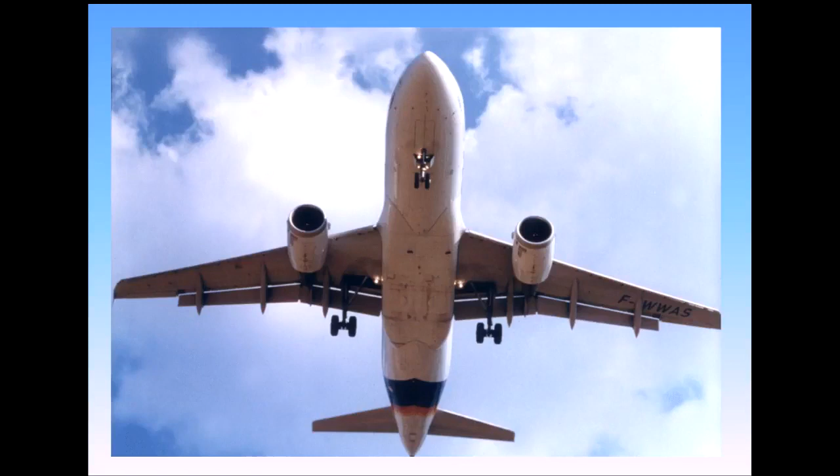The A320 is equipped with two air conditioning packs located in the wing root area forward of the landing gear bay. Let's look at how a pack works.

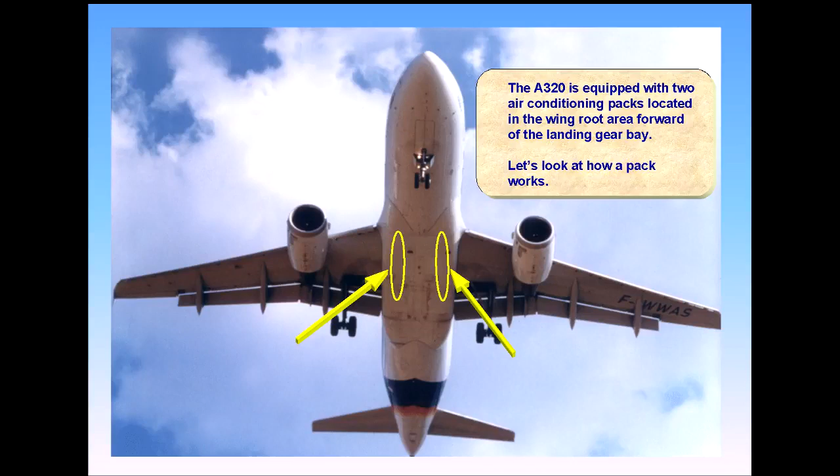Hot bleed air enters the pack via a pack flow control valve. The purpose of this valve is to adjust the flow rate through the pack.

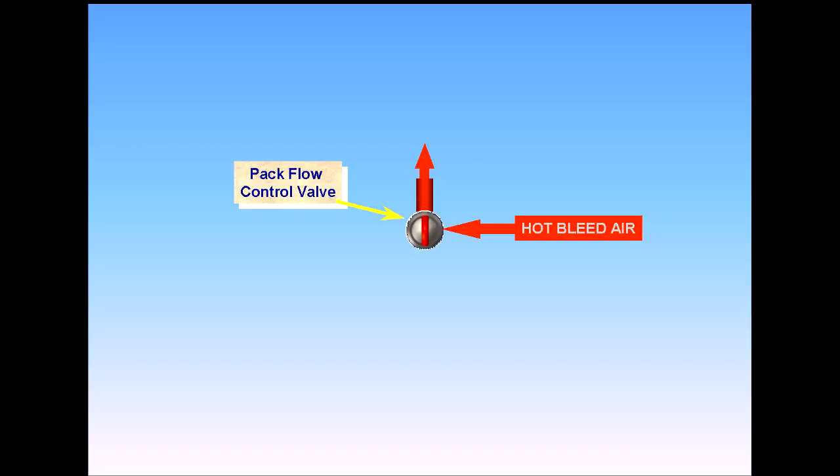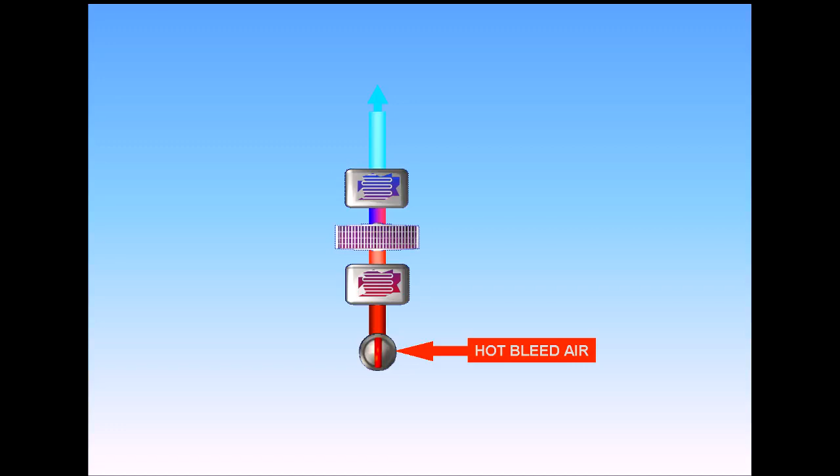The air then passes through several stages within the pack that progressively cool the air to provide a conditioned air output. In fact, sub-zero temperatures can be achieved.

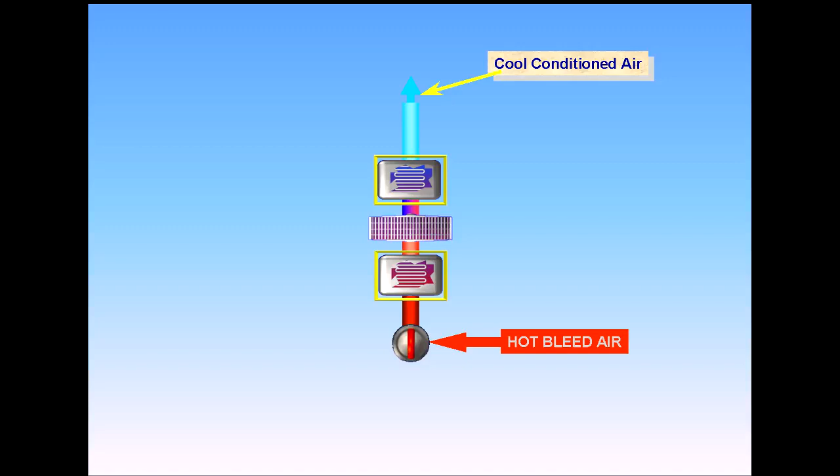Two of the stages are heat exchangers that use a flow of ambient air over them to cool the hot bleed air. This flow of air enters via a pack inlet scoop and exits via an outlet duct.

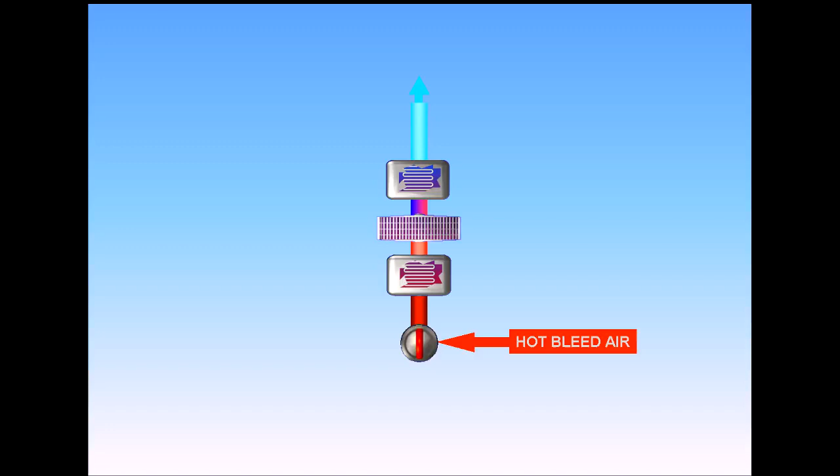So that the output temperature of the pack can be adjusted, a bypass valve is fitted. This valve allows warmer air to be mixed with the cold air.

Note, the bypass valve provides for greater fuel efficiency. Since the pack in many circumstances can be bypassed, less bleed air is needed from the engines. Thus, less thrust is needed and therefore less fuel.

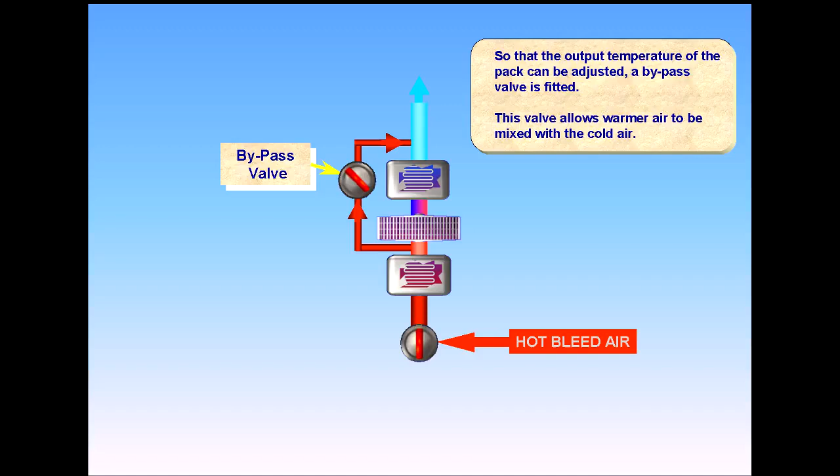The pack flow control valve and the bypass valve are regulated by the pack controller to vary the flow rate and temperature output.

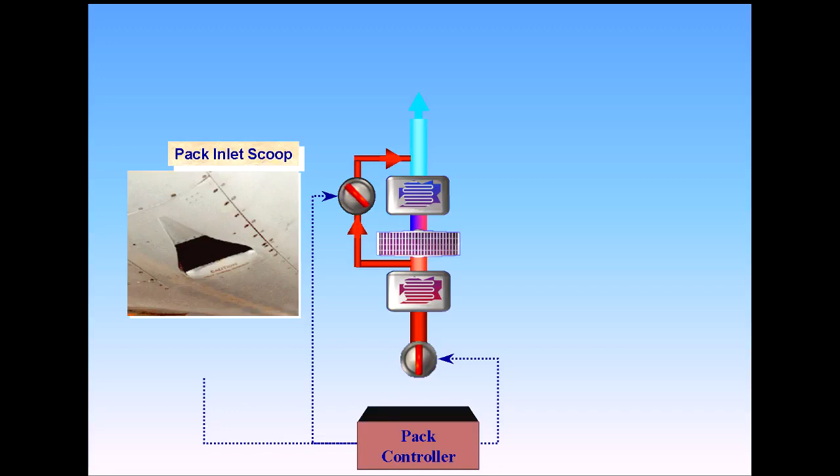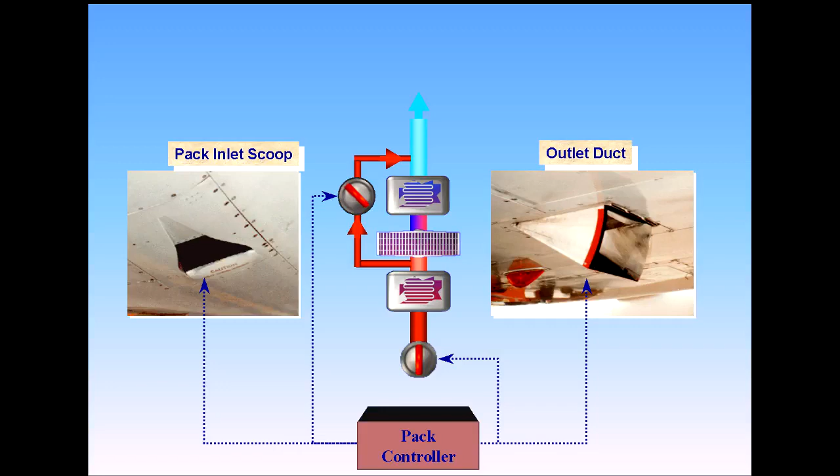The pack controller also controls the inlet scoop and outlet duct to vary the amount of air passing over the heat exchangers. Note, to avoid ingestion of foreign matter, the inlet scoop and outlet duct close temporarily during takeoff and landing.

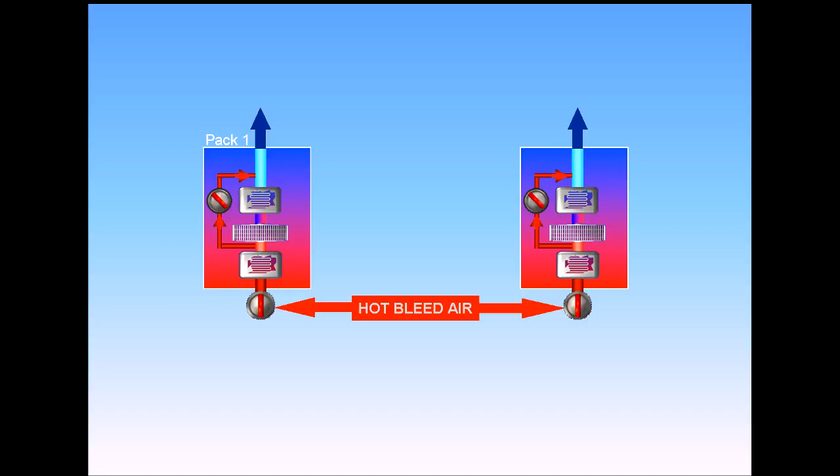The two air conditioning packs operate automatically and independently to provide cool conditioned air.

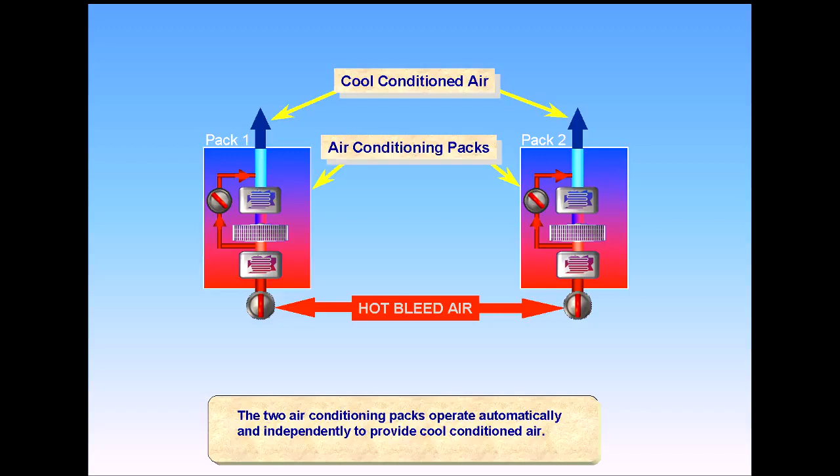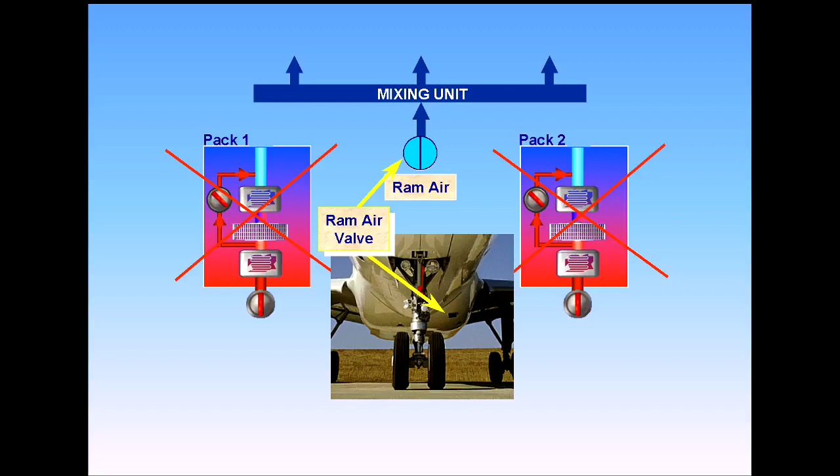The conditioned air from the packs is then fed to a mixing unit. In case of failure of both packs, ram air is provided via a ram air valve. We will look at the use of ram air in the abnormal operation module.

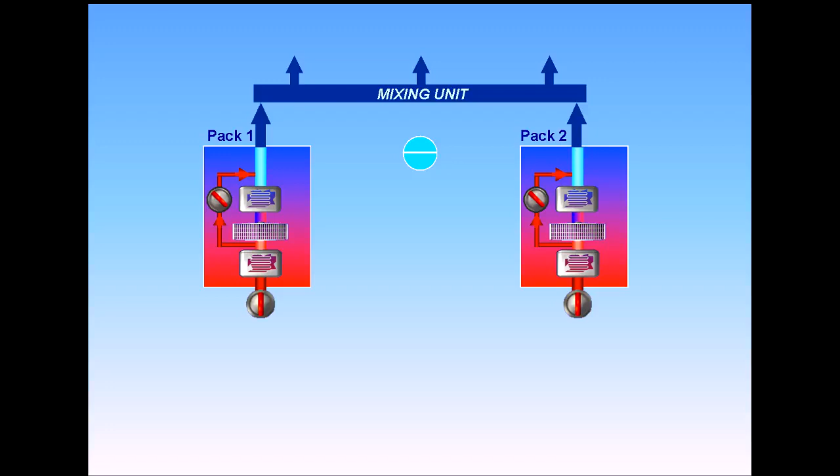Various pack parameters are monitored by ECAM. They are pack flow, compressor outlet temperature, bypass valve position, and pack outlet temperature.

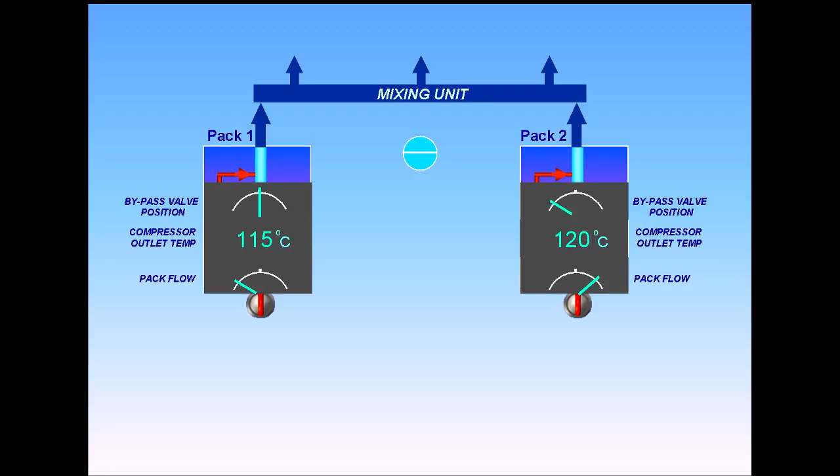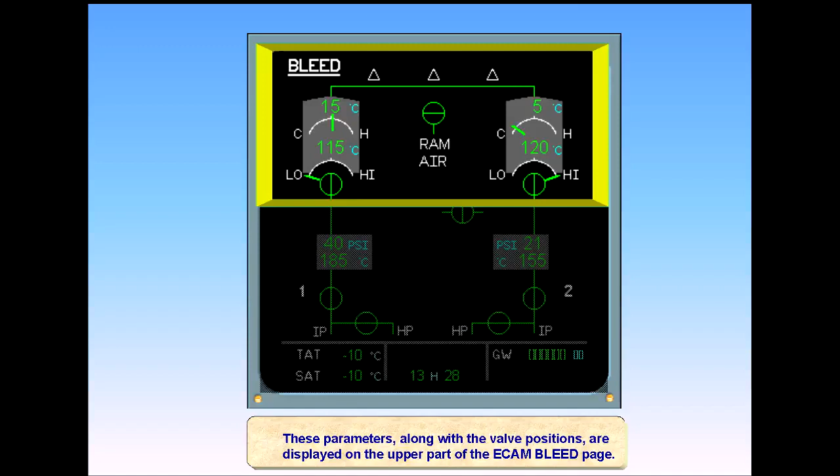These parameters, along with the valve positions, are displayed on the upper part of the ECAM bleed page. Having discussed the air conditioning packs, we will now look at how temperature and flow regulation is achieved throughout the aircraft.

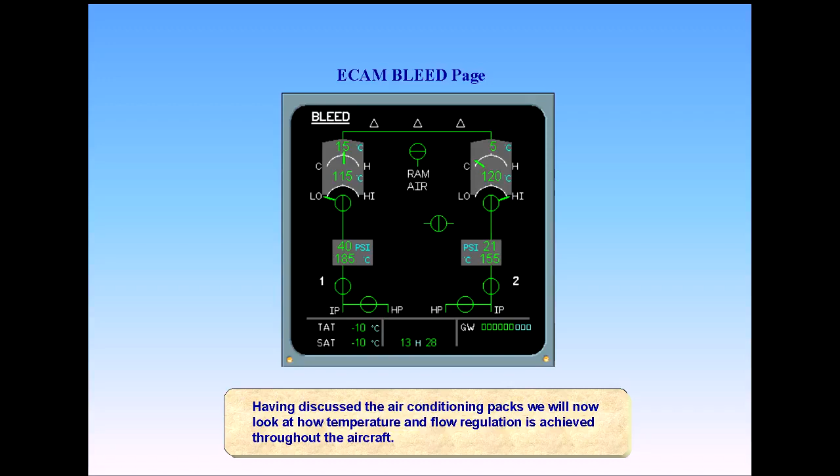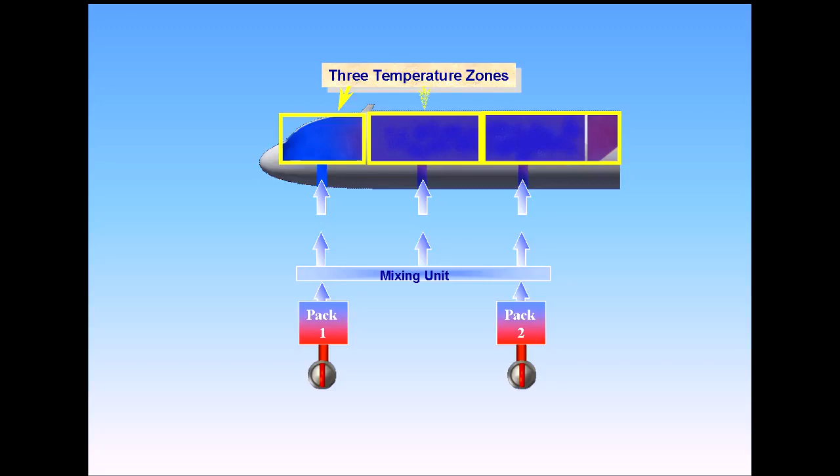The three outputs from the mixing unit feed three separate aircraft zones: cockpit, forward cabin, and aft cabin. Let's look at how the temperature of the zones is managed.

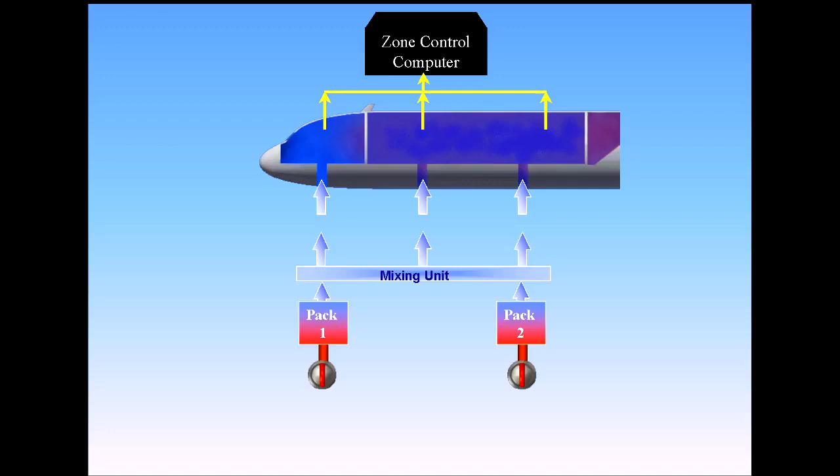A zone control computer monitors the temperatures of the three zones and sends signals to the pack controllers to set the air temperature delivered by the packs.

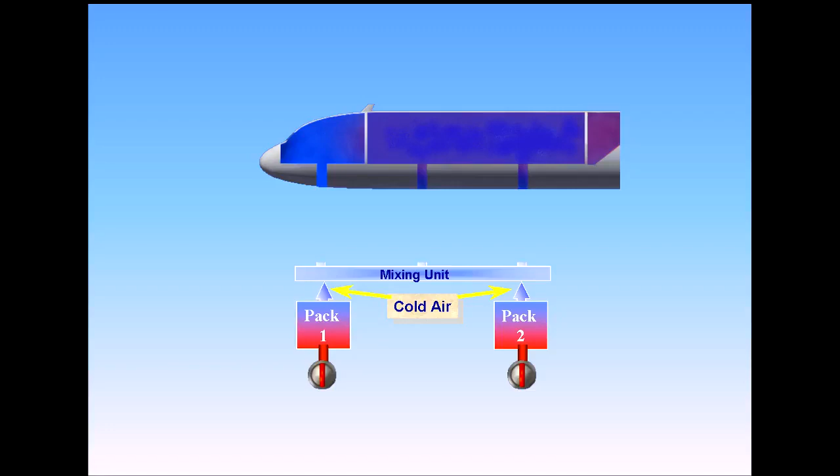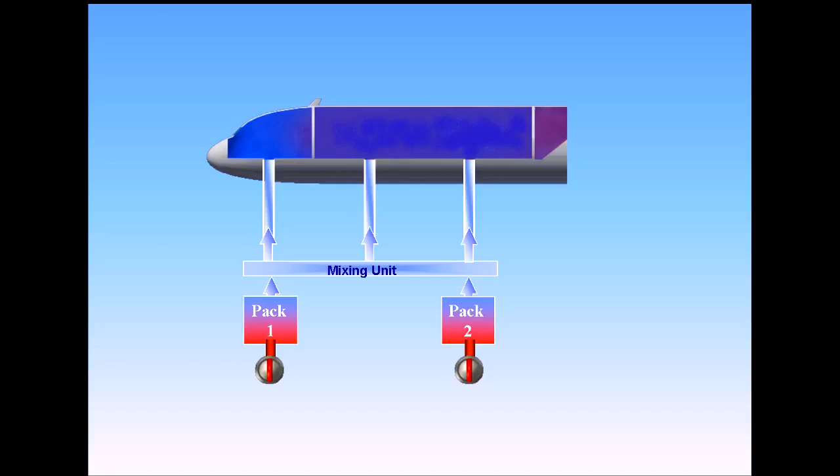Normally, cold air is delivered by the packs and is then sent to the three zones. Since the different areas of the aircraft may require different amounts of cooling or heating, hot bleed air can be added via trim air valves to achieve the demanded temperature for a zone.

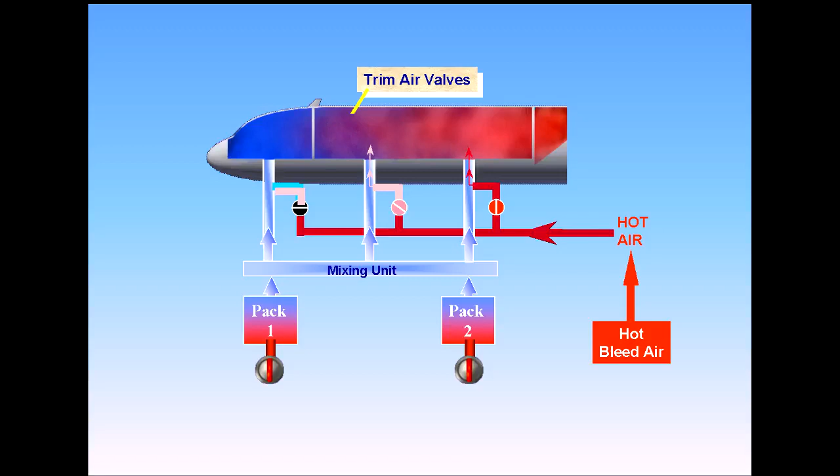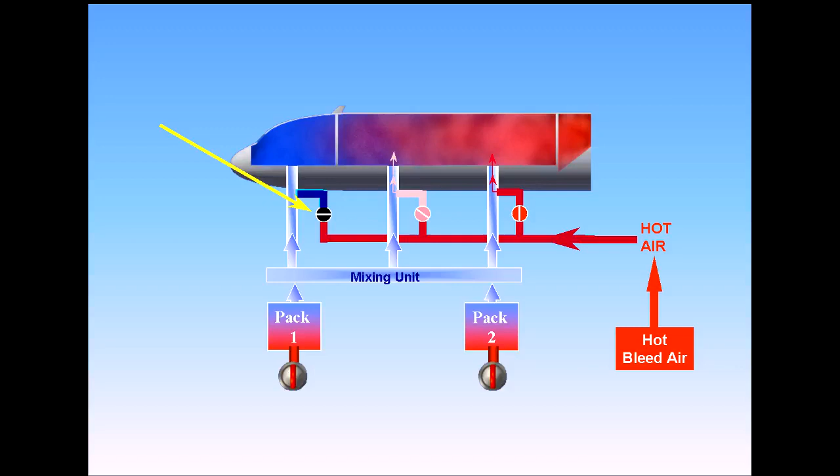In the example shown, no hot air is being added to the cockpit zone. Some hot air is being added to the forward cabin zone. A lot of hot air is being added to the aft cabin zone.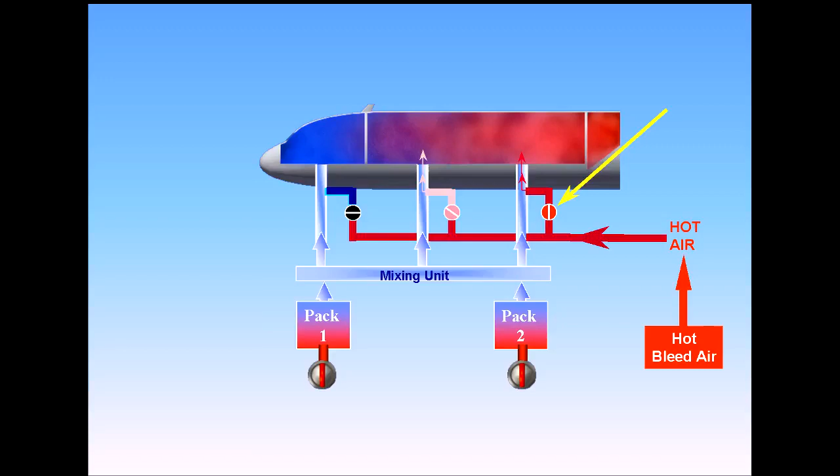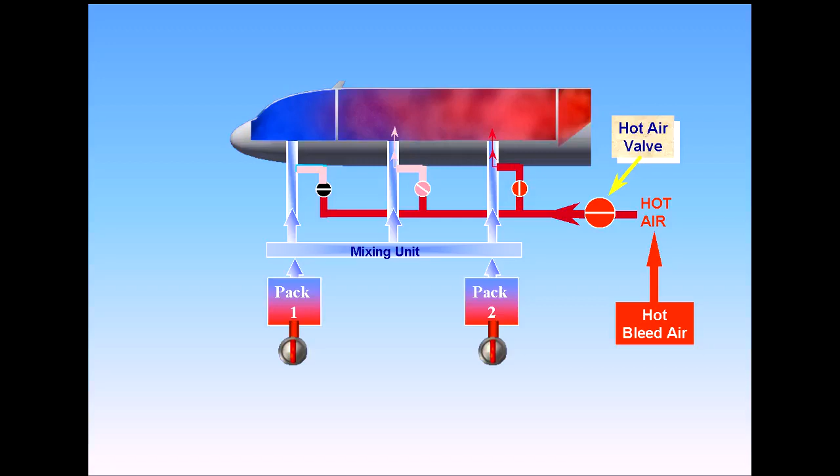The trim air valves are supplied via a hot air valve. The purpose of this valve is to regulate the pressure of the hot air supplied to the trim system and to act as a shutoff.

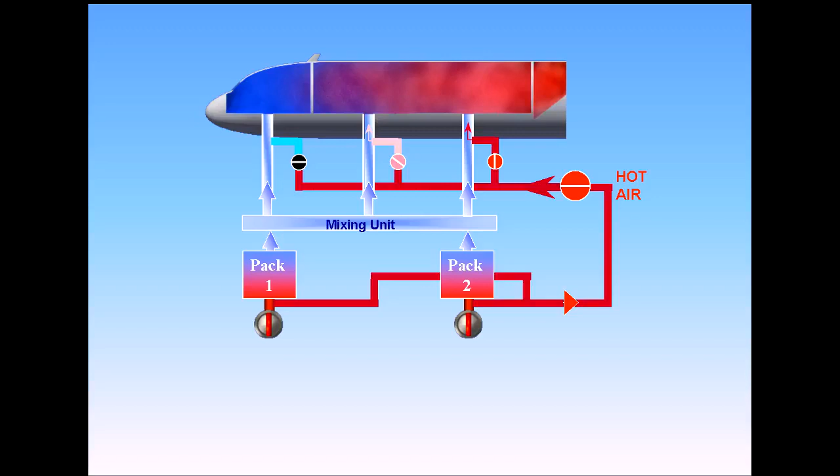The hot bleed air is supplied to the hot air valve from just downstream of the pack flow valves. This means that if the pack flow valves are closed, there is no air supplied to the trim system. The hot air valve and the trim air valves will automatically close.

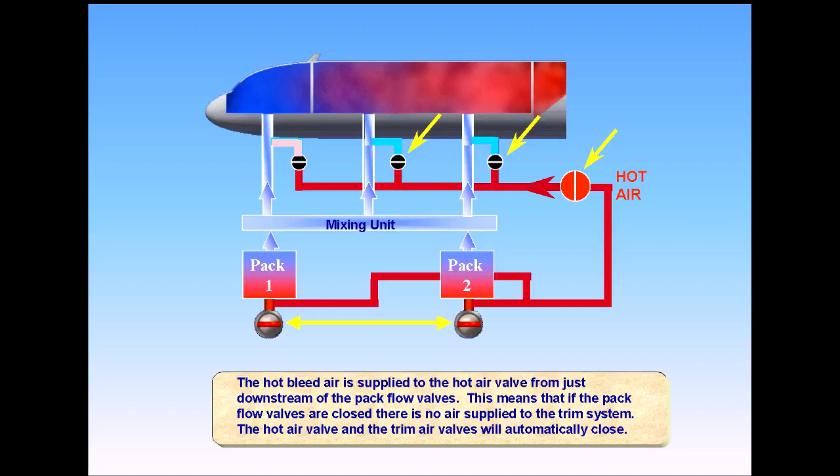The trim air valves and the hot air valve are controlled by the zone control computer.

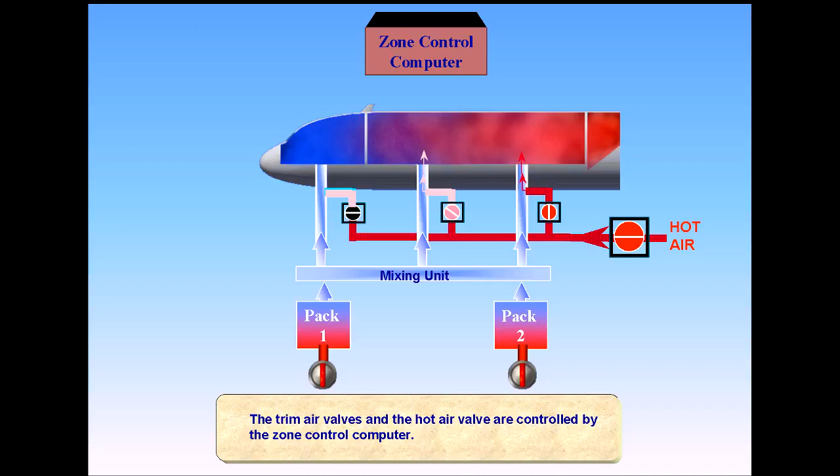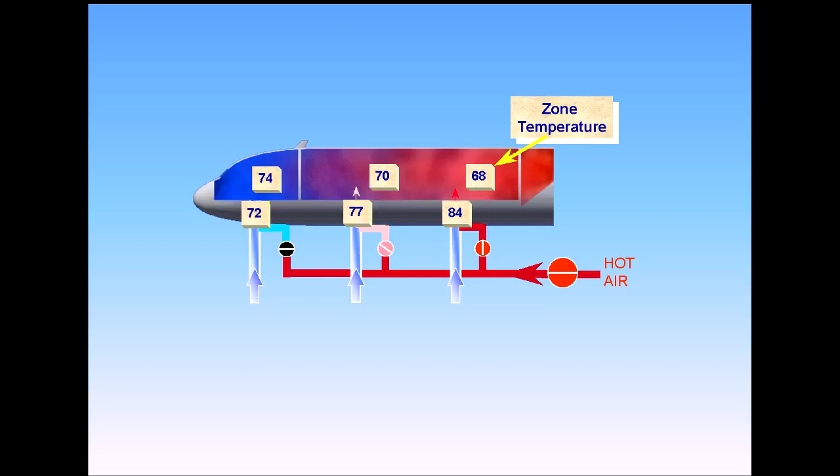Zone duct temperature, which is the temperature of the air entering a zone, and the actual zone temperature are monitored by the zone control computer and presented on ECAM.

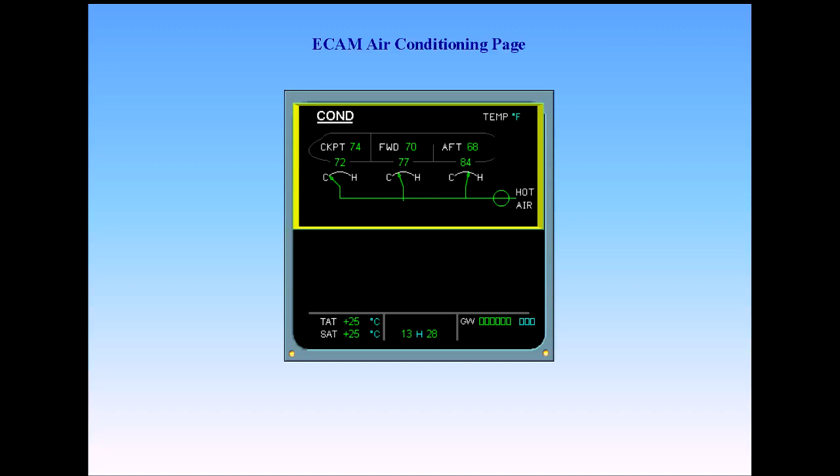The ECAM conditioning page contains zone temperature and trim air system indications. The ECAM cruise page also contains zone temperature indications.

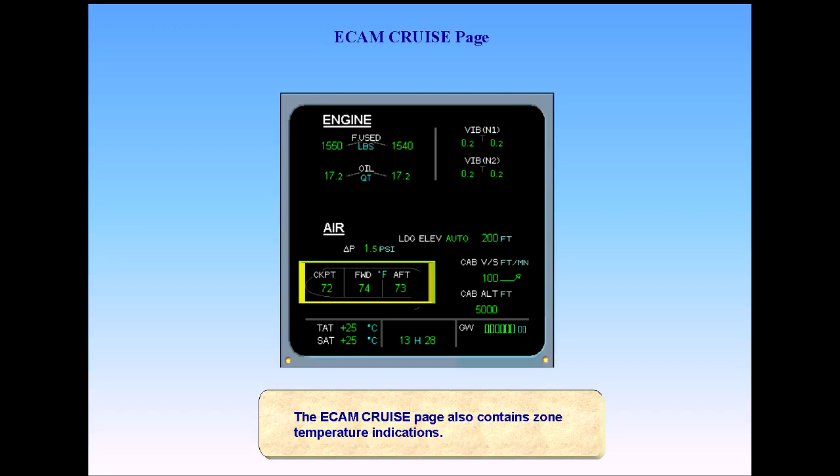On the overhead panel, there is an air conditioning panel which allows pilot control of the air conditioning system. Let's look at the controls on this panel in more detail.

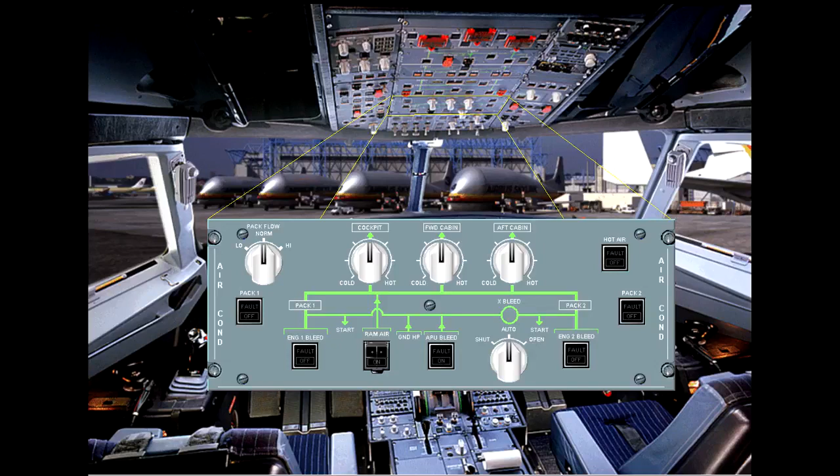The pack flow switches control their associated pack flow control valves. In the example shown, pack 1 is selected off and is indicating closed, while pack 2 is selected on and is indicating open.

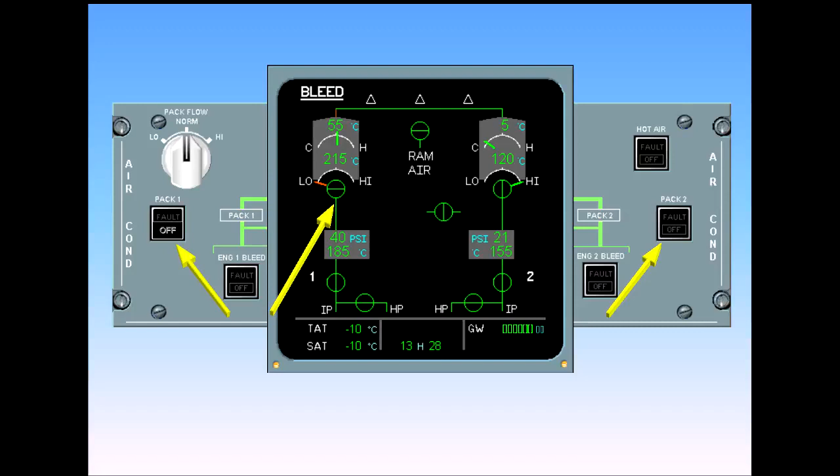The pack flow selector permits selection of desired pack flow.

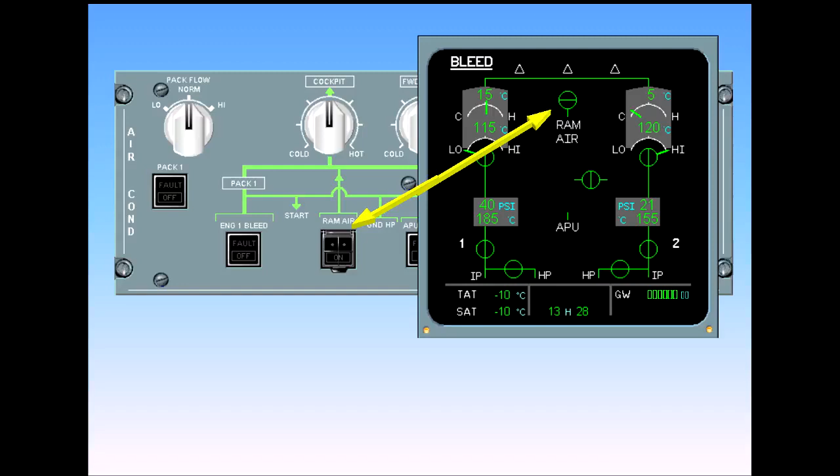The guarded ram air switch controls the ram air valve. In the example shown, the ram air valve is indicating closed. Use of the ram air switch is restricted to abnormal conditions that will be discussed later.

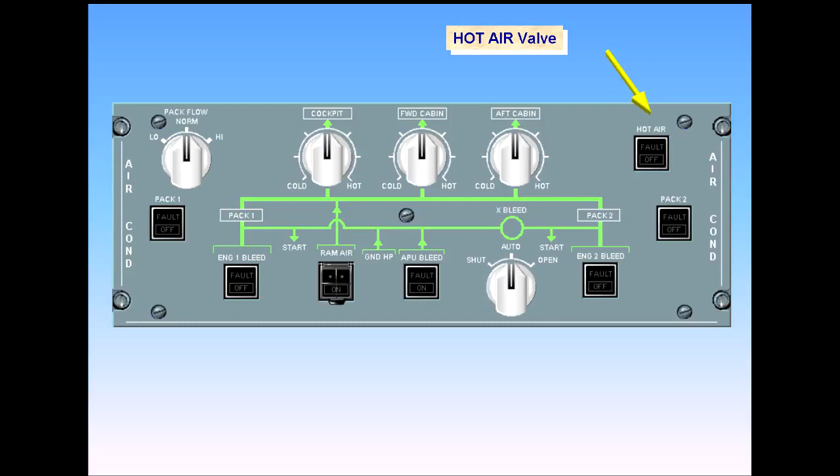The hot air switch is associated with the hot air valve. There is a hot air valve indication on the ECAM conditioning page. In the example shown, the valve is indicating open.

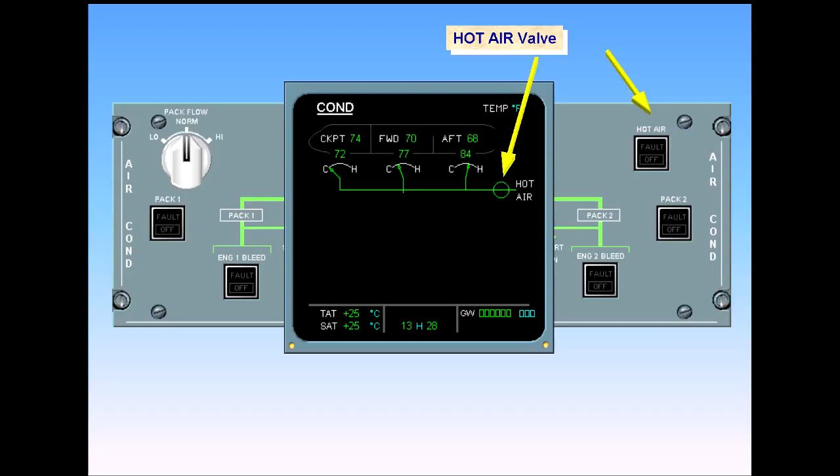Now, let's look at temperature control. The zone temperature selectors are used to adjust the required temperature for an associated zone.

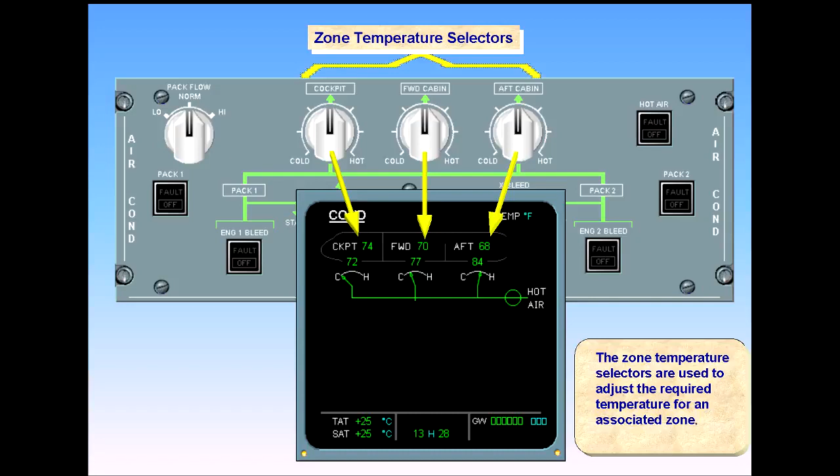2 cabin fans are fitted to reduce the bleed air requirement and therefore save fuel. These fans establish a recirculation flow of air from the 3 aircraft zones to the mixing unit. In normal operation, there are no ECAM indications associated with the cabin fans.

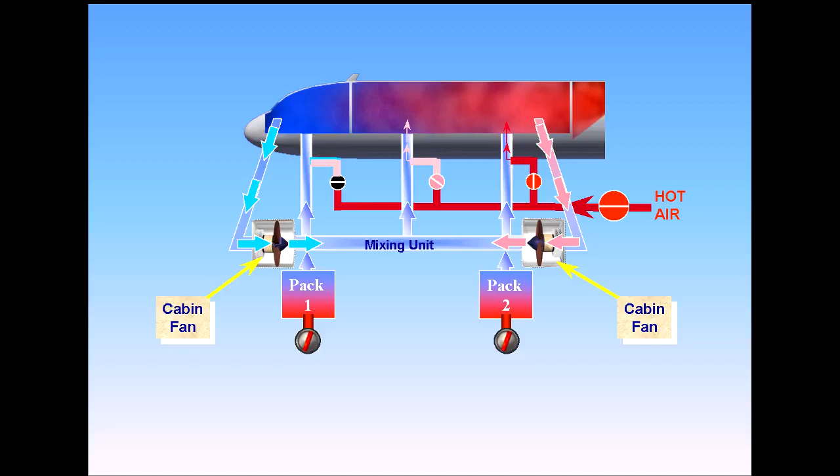On the overhead panel, there is a cabin fan switch on the ventilation panel to control the cabin fans. The cabin fan switch can be used to switch the fans off in response to ECAM procedure.

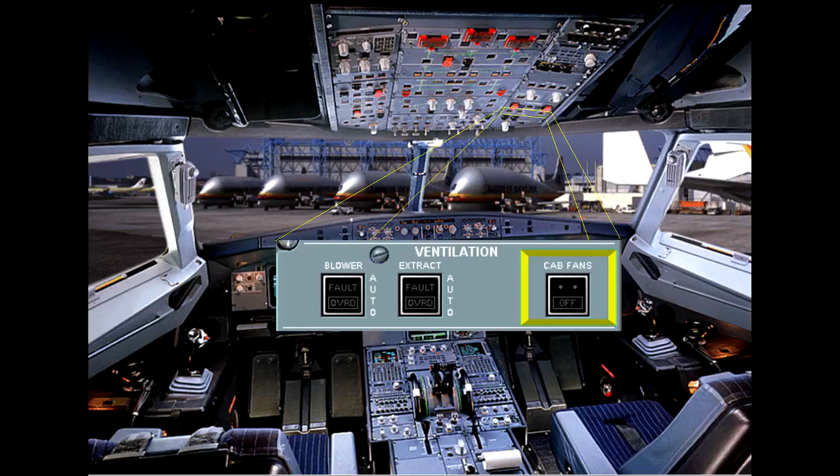The conditioning of the air in the cargo compartment is fully automatic. Ambient air from the cabin area enters the cargo compartment via an inlet isolation valve.

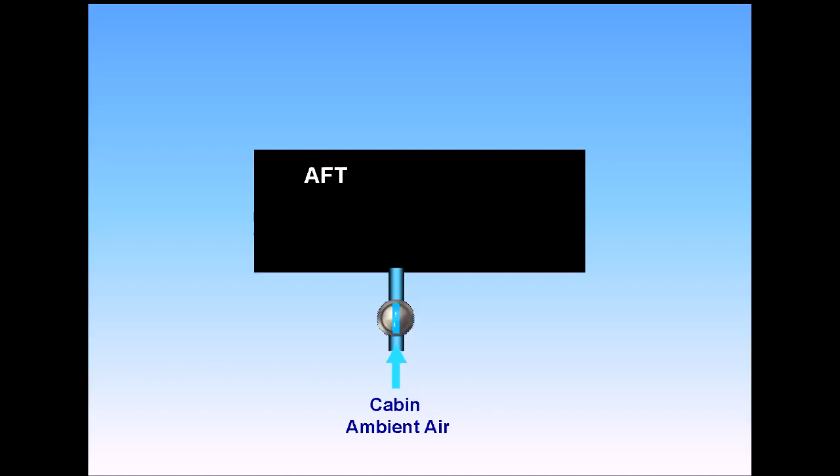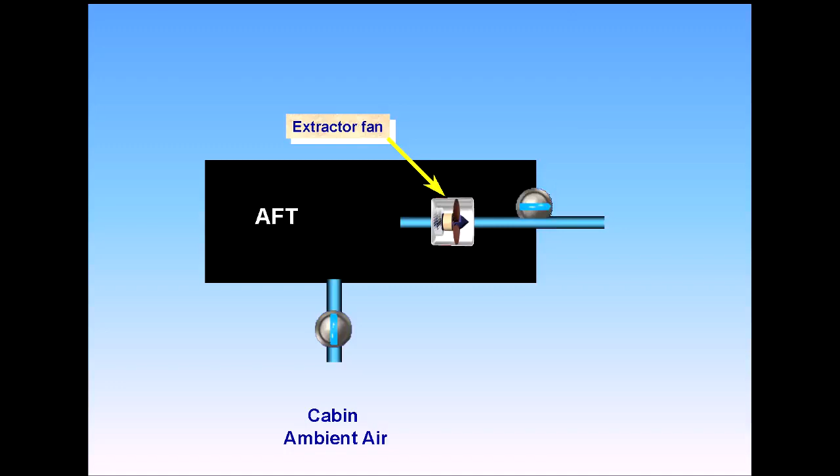The air is removed from the compartment either by an extractor fan or by differential pressure. The air is discharged overboard via an outlet isolation valve.

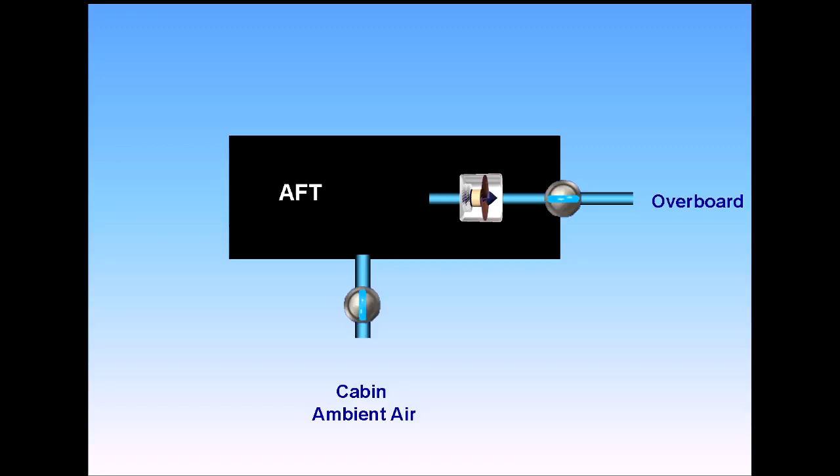The operation of the isolation valve and the extraction fan is controlled automatically by a cargo ventilation controller.

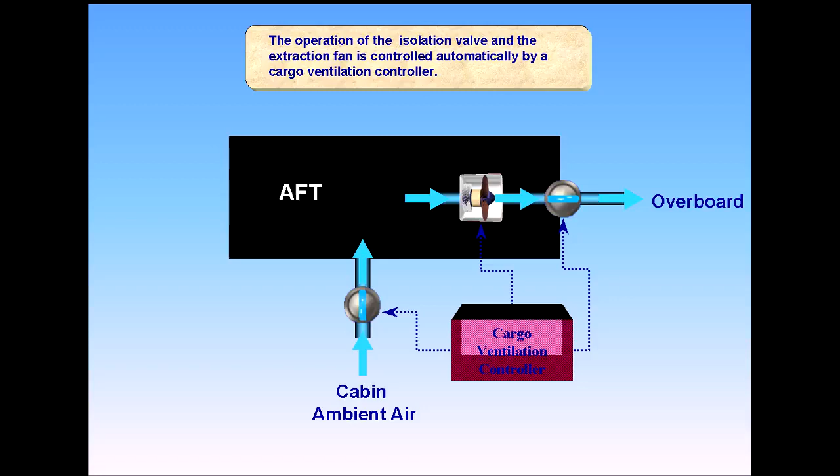To provide heating of the cargo compartment, hot bleed air is supplied via a trim air valve. The operation of the cargo trim air system is very similar to the trim air system for the air conditioning system.

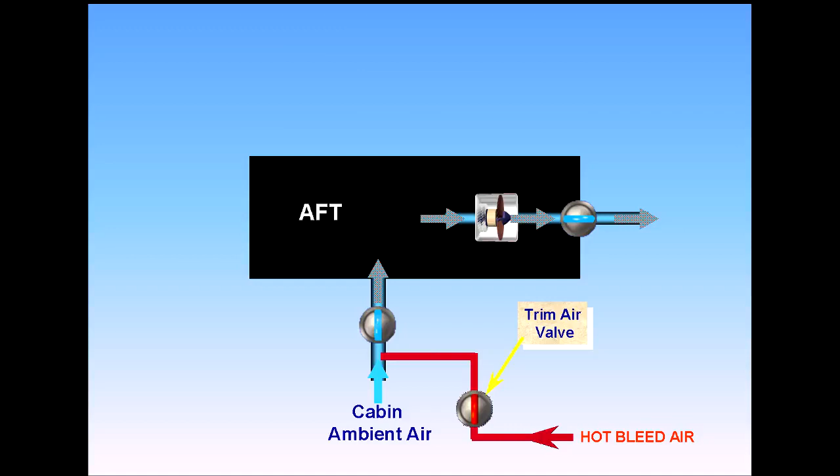A cargo heating controller controls the trim air valve position to regulate the temperature of the compartment. The information is presented on the ECAM conditioning page.

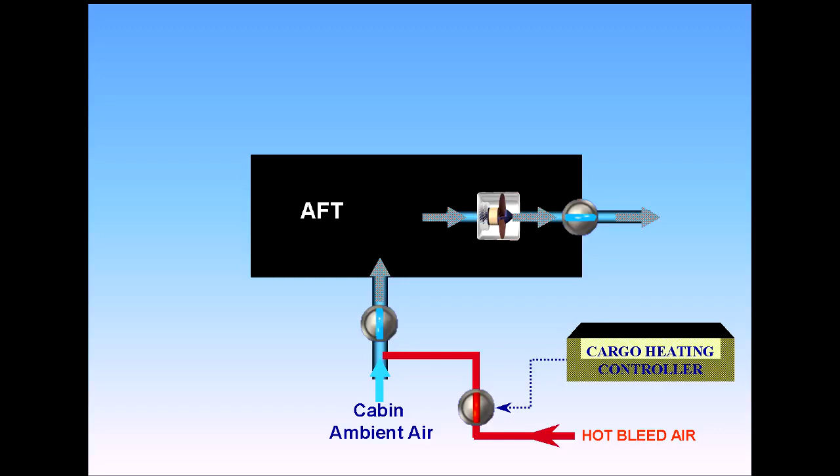The cargo heating system is an extension of the air conditioning system. Hot air is routed via an independent hot air valve for the aft cargo hold.

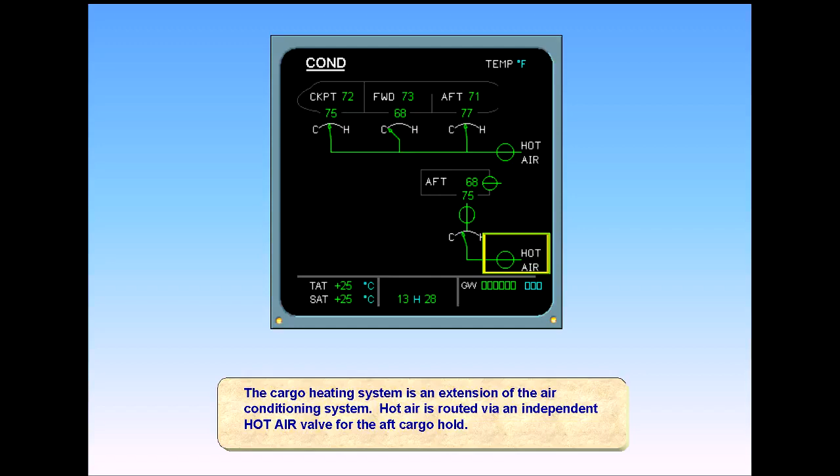The system has a trim air valve and 2 isolation valves, which close immediately should smoke be sensed, thus turning the aft cargo bin into a Class D compartment.

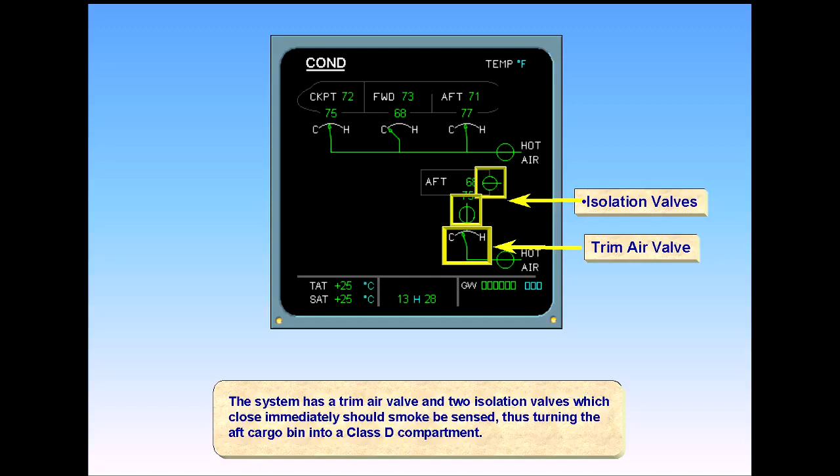The trim air valve is identical in operation to the trim air valves for cabin conditioning. It is used to add or subtract hot air.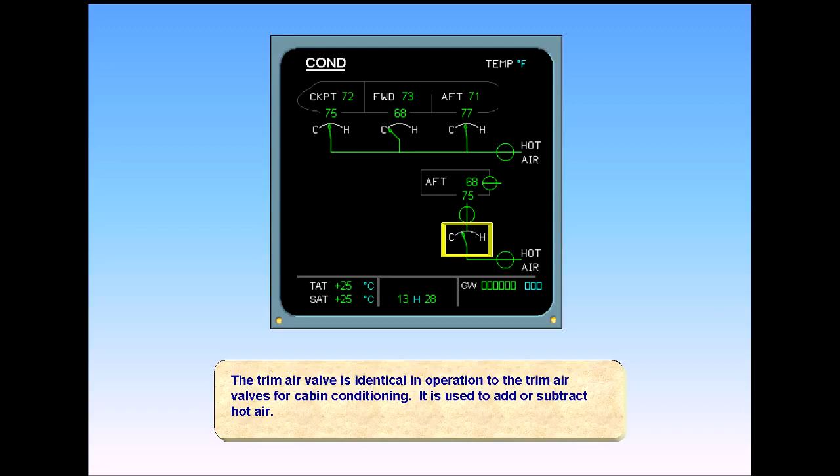Duct temperature and cargo compartment temperatures are shown on the ECAM page.

On the overhead panel, there is a cargo heat panel that contains the controls associated with cargo heating and conditioning.

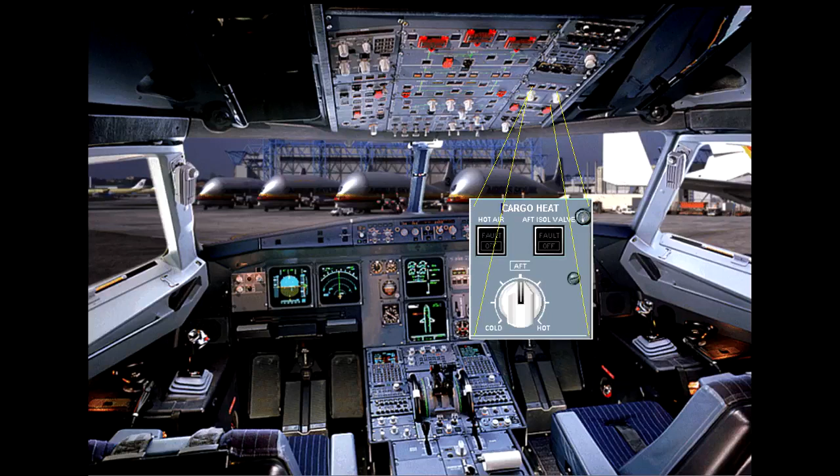This is the isolation valve switch. This switch normally remains in the open or lights out position.

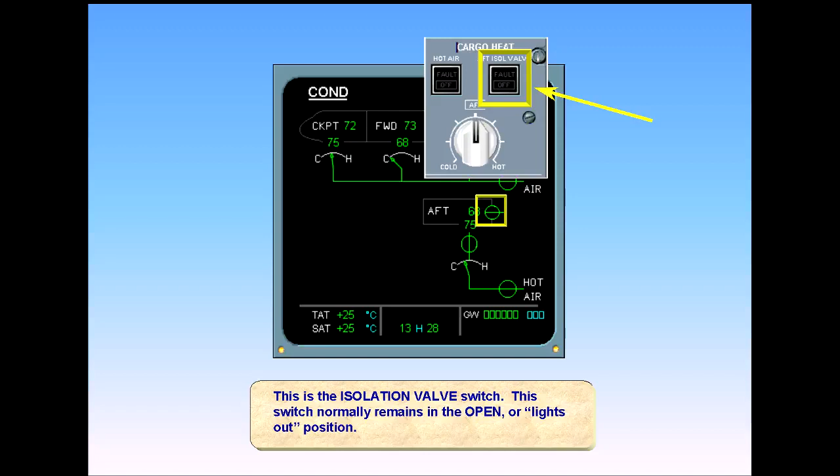The temperature selector sends demand signals to the cargo heat controller. The cargo heat controller then moves the trim air valve to adjust the temperature of the air entering the compartment.

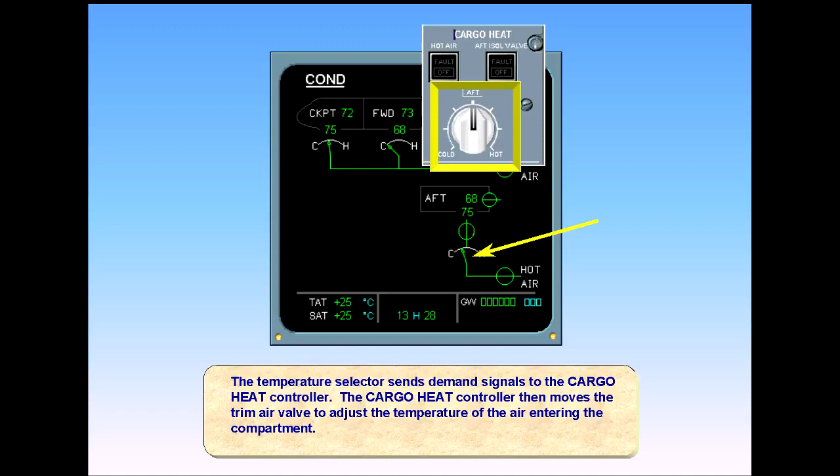The hot air switch controls the aft cargo compartment hot air valve via the aft cargo heating controller. This switch also normally remains in the lights out auto position.

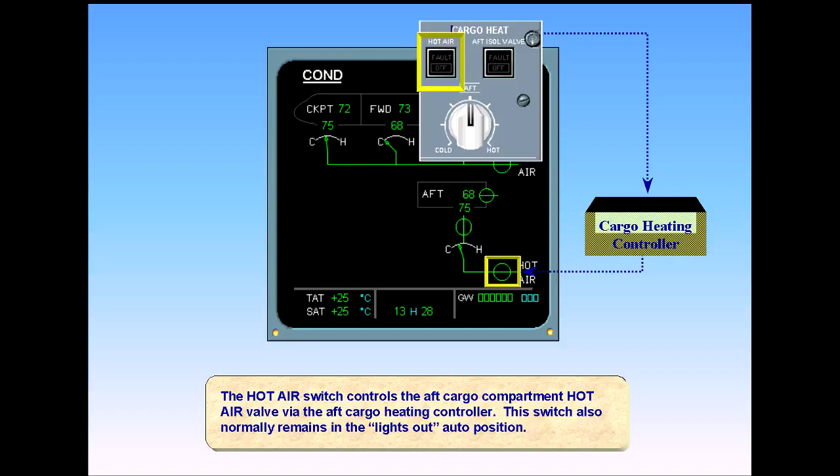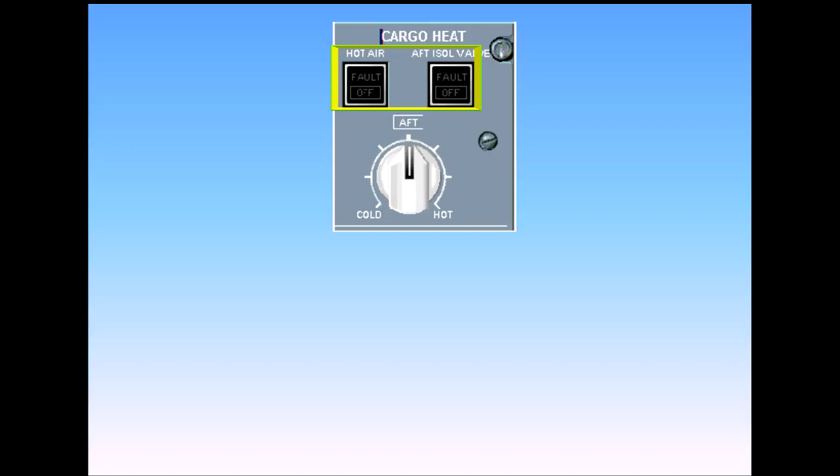For normal operation of the cargo conditioning system, the only pilot inputs required are to confirm that the switches are in their normal lights-out position, and to set the required temperatures. Note that the mid position of the temperature selector is approximately 60 degrees Fahrenheit.